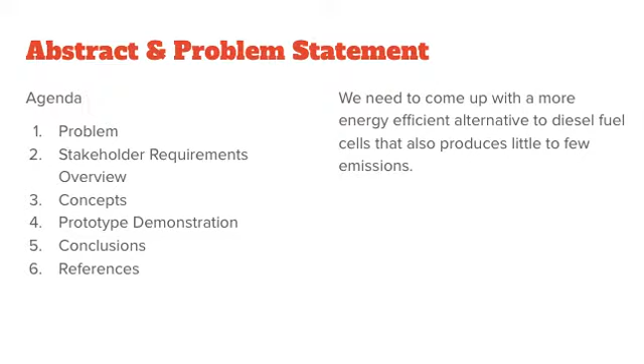And today we'll be talking about our hydrogen-powered locomotive. So our problem statement is that we need to come up with a more energy-efficient alternative to diesel fuel cells that also produce little to few emissions. So our agenda is the problem, stakeholder requirements, concepts, prototype demonstration, conclusions, and references.

So this is an overview of our stakeholder requirements. We decided that there were three main stakeholders, the manufacturers and the users, specifically passengers and the conductors or crew. Our first one is that it must be cost efficient to manufacture. We recognize that hydrogen fuel cell transportation is very costly, and thus we must take cost efficiency into account. Our second one are safety features in the case of an accident, and the stakeholders for this are the passengers.

Our last two requirements deal with the users, specifically the crew. First, there needs to be efficient, long-lasting power that can make an entire route. And the second one is that it must be easy and quick to refuel. This also came into play when we decided between lithium-ion battery and hydrogen fuel cell power, as lithium-ion batteries take a while to recharge, while hydrogen can be refueled very quickly.

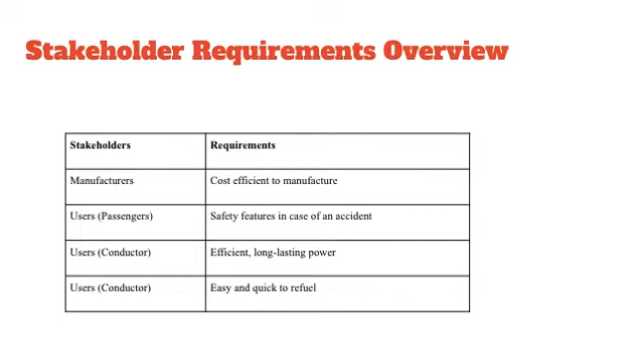This is the first concept. This is the hydrogen power source within a cab. For this concept, I chose to prioritize the amount of hydrogen that we could fit in, and I put in two very large hydrogen tanks connected to a refuel port on the bottom left corner that allows the hydrogen tanks to be refueled from the bottom of the train. And this is in a separate chamber, which is separated by a barrier wall from the fuel cell stacks, which generate the power from the hydrogen.

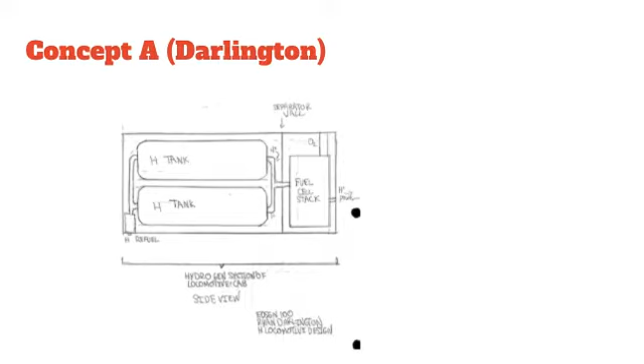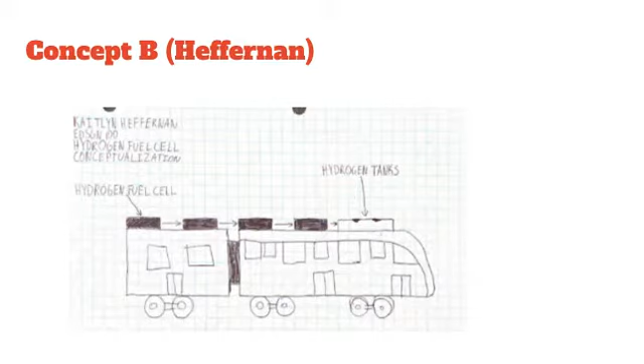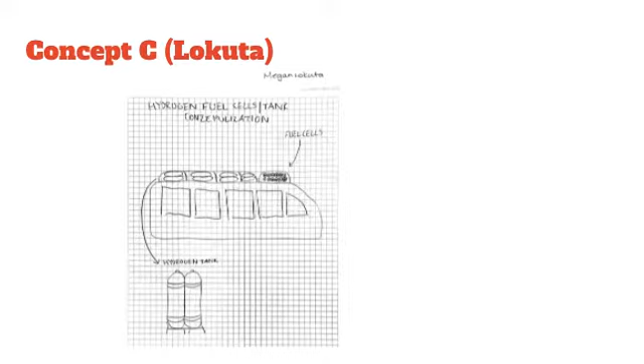So this is the second concept, which I mainly focused on the requirement of easy to access, where I put the hydrogen fuel cells that power the hydrogen tanks on top of the train, and I did that for storage reasons as well. This is the third concept and my concept. So mine's very similar to Kaitlyn's, where I put the tanks and fuel cells on top of the train to maximize storage inside the train, but we realized that this wouldn't work because we'd have to redimension the train itself so it could fit under tunnels and stuff like that.

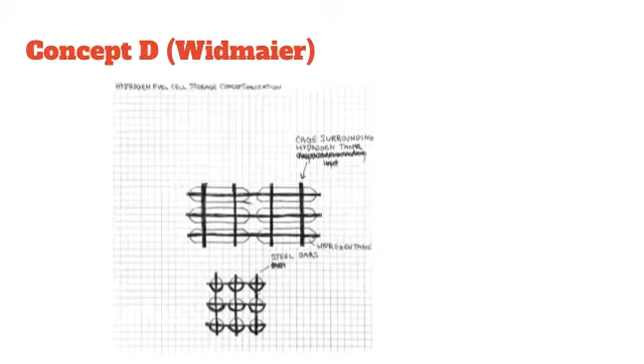This is my design, and I chose to have smaller tanks, and I also chose to have these tanks inside the train. The tanks are smaller because I anticipate that in the future, these will be more readily available due to hydrogen-powered cars. For our prototype, we decided to have the standard 160-liter tank, which is made by Mahytec. We anticipate that these will be easily available for our use. And we also hollowed out a section of the train.

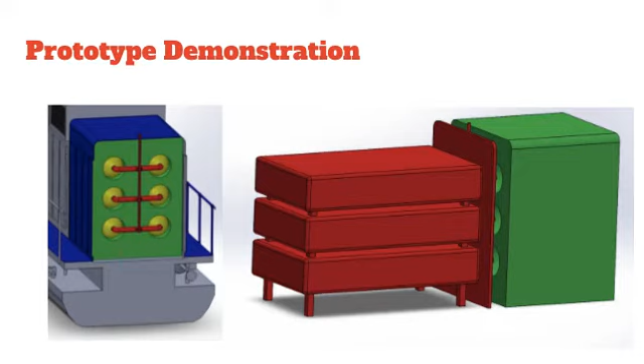Here we have the hydrogen fuel cells in red and the shell, which encases the hydrogen tanks in green. The hydrogen tanks are in yellow. And we also see a pipe that runs through all of the hydrogen that allows for easy refueling from the top of the train. Here we have the hydrogen tank seen again.

We also have a wall, which you can see in red, that separates the hydrogen tanks from the fuel cells. And we also can see that the green is the protective shell, once again covering the hydrogen tanks. And we chose to have 6 hydrogen tanks because it optimizes the amount of energy we need for the California route.